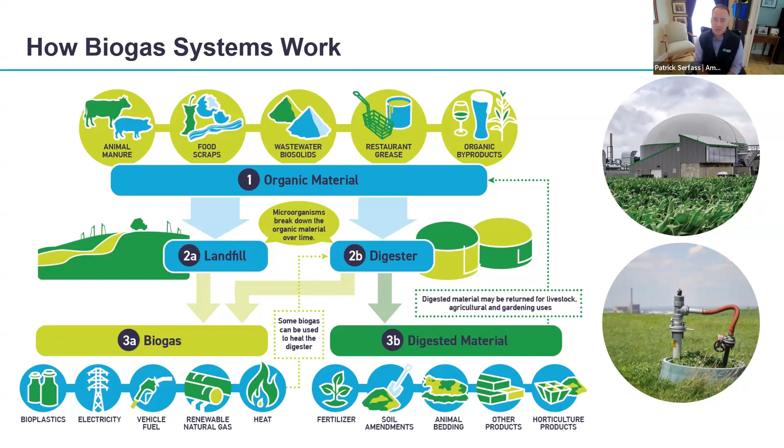And so if you are not in a landfill and you're at a tanked digester, you also produce digested material, which can be used to displace synthetic fertilizers.

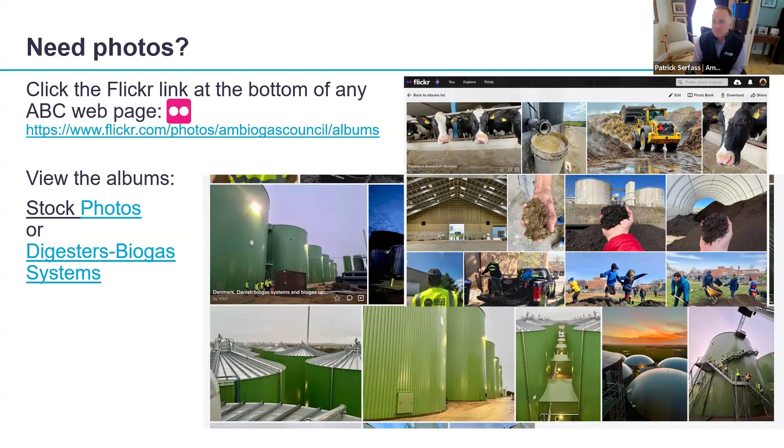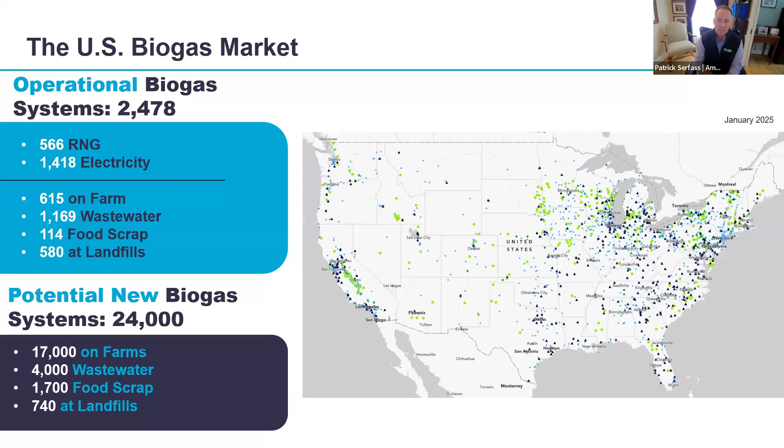There's biogas systems in all 50 states. Why? Because there are people and animals in all 50 states, or at least one of the two. And the people produce waste, whether it's your human manure or the food waste that we produce, and then the animals, same thing. So we want to recycle all that organic material. If we recycled all of it, we would be building an additional 24,000 systems. So you can basically consider the US biogas industry about 10% built out. Most of the opportunity is left for us.

So I'm going to cover a couple things for you here. We've got maybe about 10 slides or so with some data, but here's some of the high points.

2,500 facilities now, 125 new ones, and a 13% increase in biogas output capacity. So the growth from 23 to 24 compared to the growth from 24 until now, we are seeing an acceleration of growth of new facilities, an acceleration of growth of 17%, and an acceleration of growth in biogas capacity as well of 13%. And likewise, an acceleration of growth in the investment that we're seeing as well.

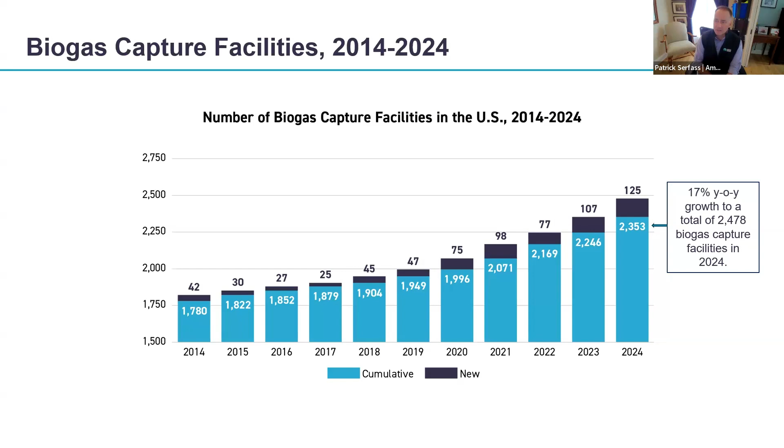So here's the growth of the industry. This is all biogas facilities in the US, and the dark bar on top shows the new systems that went into operation each year. If you look over the last 4 or 5 years, you're looking at about 100 new projects a year that we've been adding. But last year was a record-breaking year, and that's one of the biggest headlines for 2024: most growth ever for the industry, 125 new facilities, 17% more than the 107 that came online the previous year.

If you look at the total number of facilities, our 2,500 facilities, by feedstock - the amount of material coming into the biogas systems - you'll see wastewater facilities actually dominate the number of facilities. That's where most of them are. The main change for 2024 is that this is the first year that farm-based or agricultural projects exceed the number of landfill projects, moving into number 2 from number 3.

If you look at the year-on-year growth, you can see that growth of landfill systems actually did shrink. We had less growth in landfill in 2024 than in 2023, but overall still a lot of growth - we'll show you more about that coming up. There's also exceptional acceleration of growth for agriculture and wastewater facilities. We're still building food waste-only systems, which are a bit more complex than the others, but a lot of people in our industry are pretty bullish that food waste systems will see much more significant growth in the coming years.

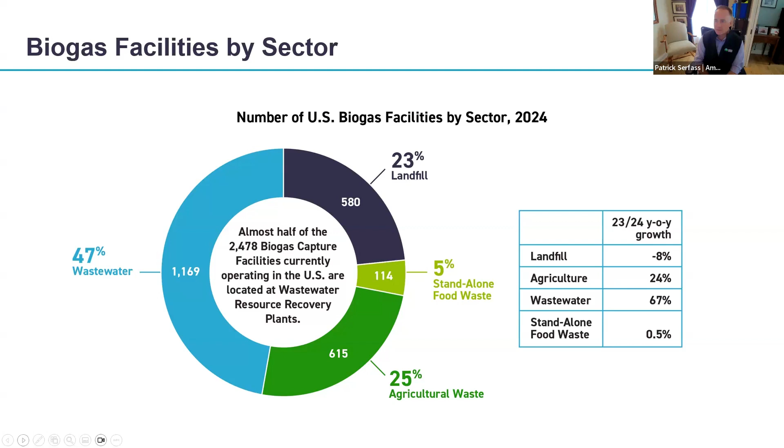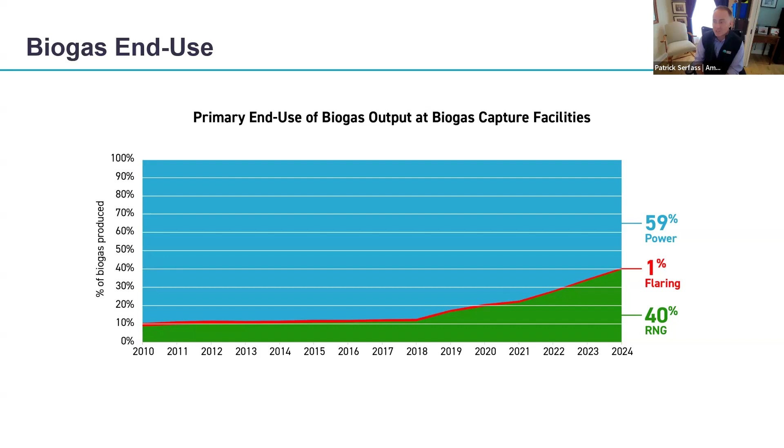So some facilities are just flaring all or most of their gas, and that 1% represents those facilities, even though they have a biogas system. This mostly happens at wastewater facilities, but it's a small percentage, and it's actually been shrinking over time as people realize they can do something useful, environmentally and economically, with the gas.

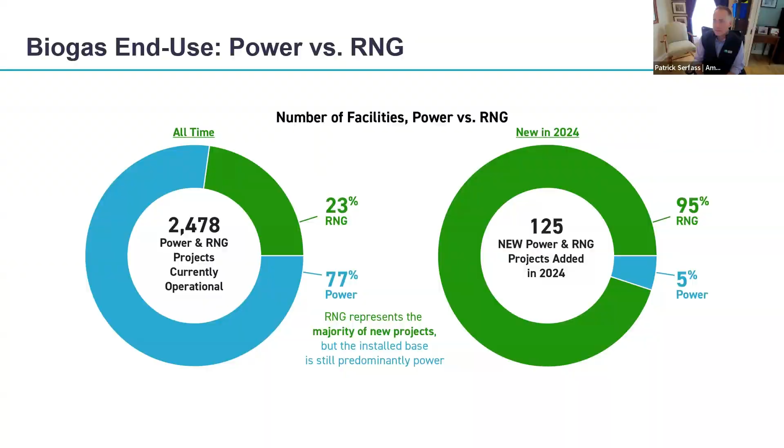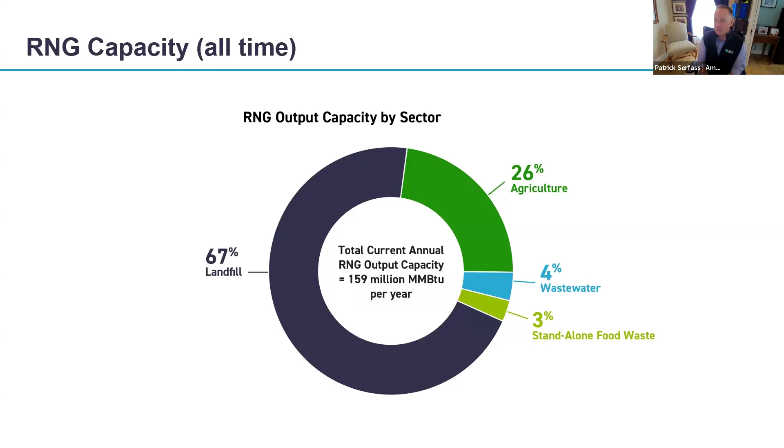Looking just at RNG projects, since it's such a growing and important sector for new projects, the industry is producing about 160 trillion BTUs of energy every year, and most of that is coming from the landfill sector. While landfills are now number 3 in terms of number of projects, the amount of gas they produce is really high since they produce so much more gas. Almost three-quarters of all gas — two-thirds would be more accurate — comes from the landfill gas space, compared to about a quarter from farm-based systems.

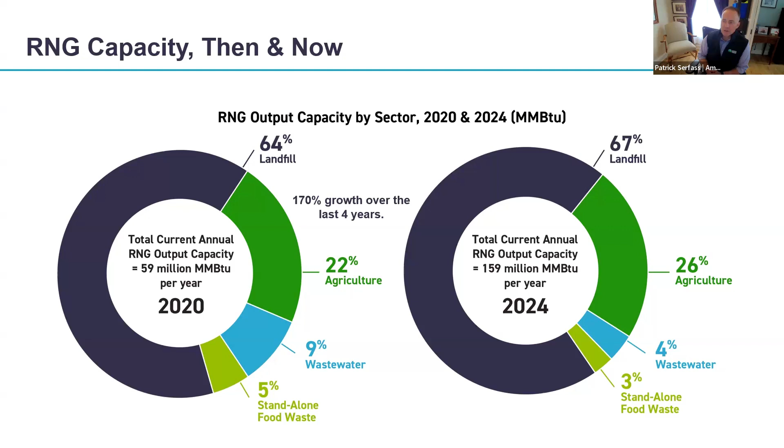And you can see that more visually here. If you look at it over time, you can see the wedges that are growing are the dark blue ones, which is the landfill sector, and then the dark green sector, which is our farm-based agriculture systems. So RNG capacity is certainly increasing overall, largely due to landfill and agriculture.

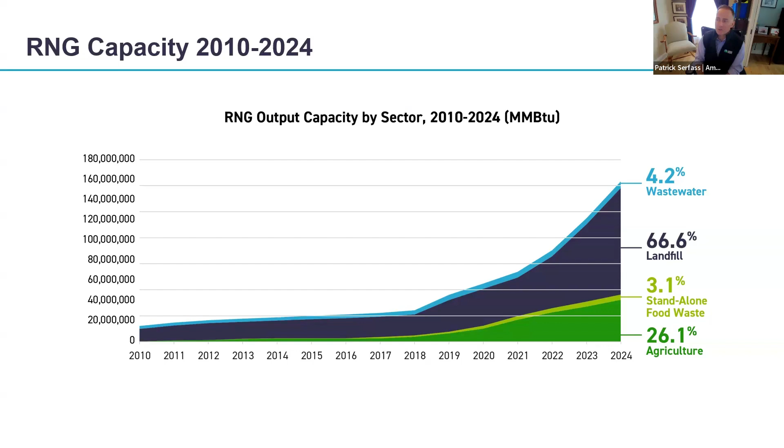Although if you look, the food waste systems are increasing as well, and less so, but wastewater facilities, there are more RNG facilities coming out. And again, that's just due to the economics today in terms of how much more revenue you can produce by selling your biogas as RNG versus renewable electricity or heat.

If we just look, I've got a couple left here, just look at the sectors from our feedstock sectors individually, just give you a few snapshots in case you happen to be more interested in these subsectors of the industry. This is where we are with wastewater.

There's much more even distribution than we had seen in the last couple of years. So basically, you're looking at the size of facilities here. The smallest wastewater facilities on the left, 1 to 9 million gallons per day, that's what MGD is. The largest facilities is the second to last chart on the right there, and that's greater than 100 MGD.

I'm in Washington, D.C. We have one of the largest wastewater facilities in the world. It's 400 MGD, and they would fall into that last category. But we're still doing a lot of work. There's about 1,800 facilities that we don't know how big they are, where we haven't confirmed their size yet. So we're still tracking down that information.

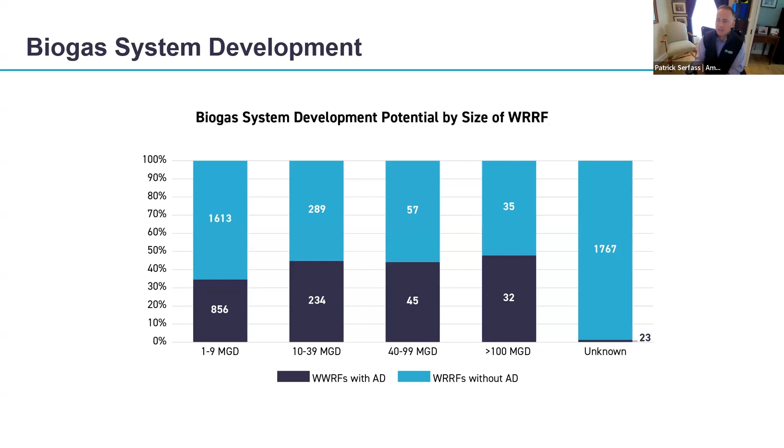So you can look at this as biogas systems work at most sizes of wastewater facilities above 1 million gallons a day. And you can also see that there's a lot of opportunity for new projects in the wastewater sector to take that sludge that you're pulling out of sewage and extract the energy out of it so that you don't have to send it to landfill, and then use that digested material to replace synthetic fertilizers and grow crops and other things.

If we look at just the farm sector here, here's a snapshot of the types of farms where biogas systems exist. This is all biogas systems. So basically 600 farm-based systems, 86% of those are on dairies. That's for a few reasons.

Dairy cows produce a lot of manure, about 120 to 150 pounds of manure every day. I like to say that every full-size dairy cow produces a person of poop, basically a full person's body weight of manure every day. That's a lot of manure, and that's a lot to recycle, and you can create energy from that. So as a waste management tool, recycling tool, and renewable energy tool, dairy certainly has an edge.

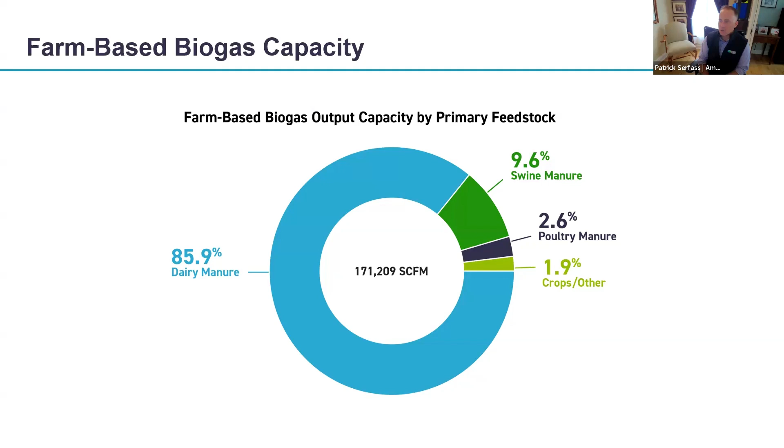But the swine industry and poultry industry are catching on and building more and more biogas systems now. So I expect those sectors to grow quite a bit over the next several years as those projects are taking off. And then if we look at the food waste systems, this is first a look at all food waste.

So about 66 million tons per year of food waste, according to the EPA. If we add up all the organic material that is being recycled, remember, two ways to recycle organic material: compost systems and biogas systems. If you add up all those biogas systems that are just recycling food waste, and you add the compost systems, there's about 14% of our post-consumer food waste in the US that's actually being recycled. What an opportunity to expand that, build more biogas systems and compost systems alike.

Think about when we throw a tray of food away at a restaurant or at a food hall, there's all kinds of other things that are probably not food waste that gets thrown in there that need to be filtered out. So the facilities generally prefer pre-consumer if you can get to it, but we can handle it all. You just need to add more equipment to clean it up first.

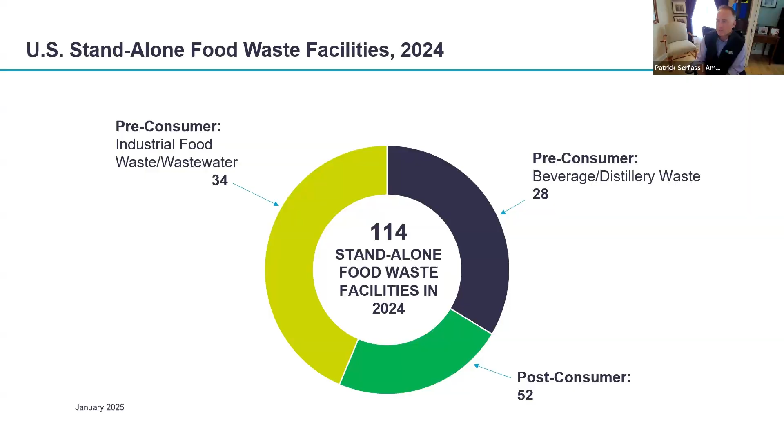And with that, I am going to turn it over to Heather, who leads our entire policy program, to give you a sense of what's really driving the industry and where we are right now.

Thanks, Patrick. So as Patrick noted at the top of the call, organic waste is everywhere. This is not an urban or rural or red or blue issue. Whether you're in a city dealing with human waste and food waste, or you're in rural communities dealing with ag and food processing material, this is nationwide.

And so this is a really rare bipartisan issue, potentially, especially when we talk about federal policy. But we see a lot of interest, not only in things like recycling and emission control from managing waste differently, but also the economic benefits and the revenue potential of managing waste differently. And so we'll get into a little bit of that here in the policy slides. So next slide, Patrick.

So the way we look at policy around biogas systems is how do we create incentives that build the recycling centers. As Patrick noted, we have a very diverse membership. And what that means is the common ground for us as an organization, and when we think about policy, is how do we get waste into the systems where we can extract all of that value? Yes, energy, but also a bunch of other commodities and revenue opportunities.